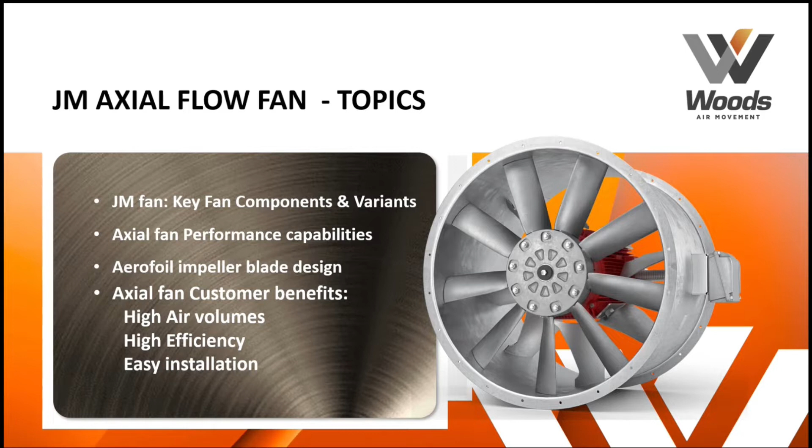Okay, so just to go through the key components, this is an image of a JM fan, but the main components are the same. You have a duct or housing, fan casing - in this case a long casing, so you've got flanges on both ends covering the entire length of the fan impeller and motor assembly.

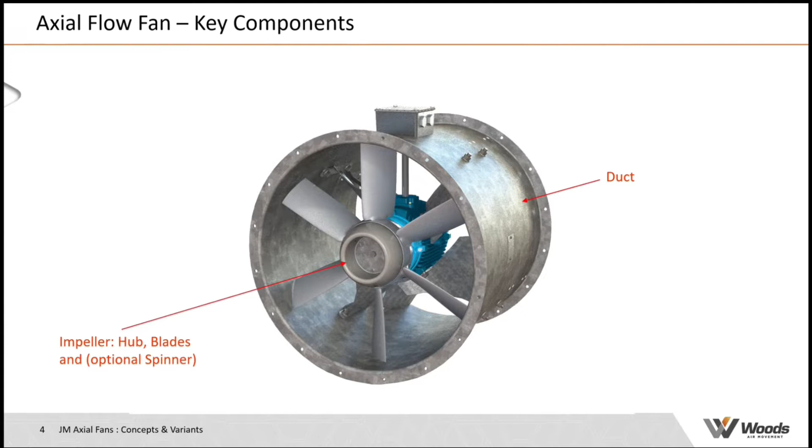You then have the impeller itself, and in this case there is a spinner affixed to the hub - we'll talk more about that later. Then there are 4 mounting arms, which in this case are also guide vanes to add additional performance to the fan. And of course the motor, a key component in the middle, joined to the terminal box on the outside via a wiring conduit.

And that's essentially it. It's a very basic description, and most of you might already know this, but it's useful if you're trying to explain axial flow fans to somebody who's unfamiliar. This kind of diagram says it already.

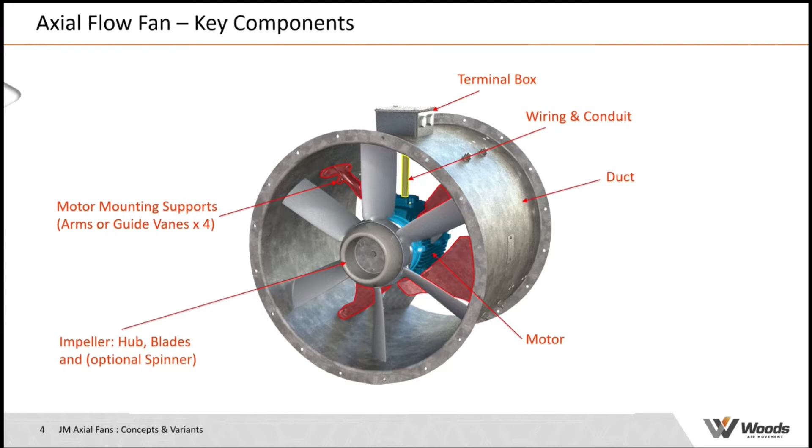Okay, so now I want to do a little comparison between axial flow fans and one of the other key options we've got when looking at a solution for ventilation, or it might not be ventilation - could be some other specific application. Generally the options split down into centrifugal or axial, and there are variants of centrifugal fans. There's something in between, which is mixed flow, but I'm not really going to talk about that - I'm just going to focus on centrifugal fans.

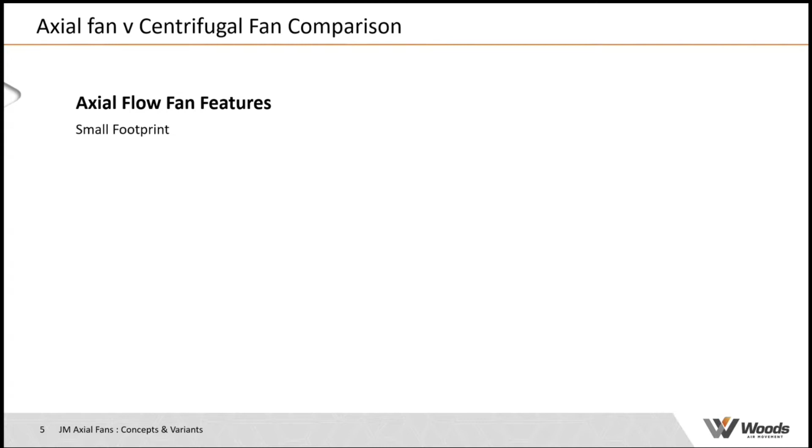So if you look at the axial flow fan features, you could say: you've got a small footprint in the axial flow fan, it's a compact unit really, and easy to install and remove from ductwork because it's installed into inline ductwork, which is different to a centrifugal fan. Centrifugal fans, by their very nature, turn air around 90 degrees, which means that unless you've got more complicated casing, the air enters and leaves the fan at 90 degrees to each other. So the ductwork is a bit more complicated in that respect.

You have efficiencies for the JM range up to 85% - I have to be specific, we're talking about up to 1.6 meters in diameter. There are larger fans in our range with higher efficiencies, which are a bit more bespoke, but we can achieve higher efficiencies - I'm talking more about the standard range. Centrifugal fans may have an advantage over that by maybe 3 percentage points, so it's not a vast difference.

Generally speaking, axial flow fans nowadays - wasn't the case so much in the past - but now direct drive is the only real practical option. Belt-driven fans were something we used to do, and in some markets it's still something people ask for. Coupling drives are really bespoke for OEM-specific applications, so they don't get requested that often, but if there's enough potential for a particular inquiry, we would look at that. Direct drive is really the main solution.

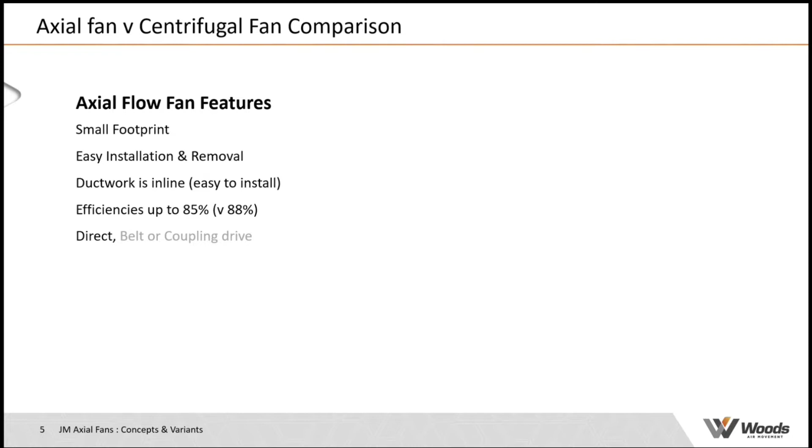So if we then look at noise levels, you can't get away from the fact that an axial flow fan runs at high speed and predominantly creates high frequency noise. But it has to be said that if you're treating that noise with some kind of attenuation device, high frequency noise is much easier to attenuate out than low frequency noise, and it's just a factor of the length of the waveform.

In an axial flow fan you've got adjustable geometry, you've got blades that you can move around to get different performances. So it's flexible in that regard, whereas centrifugal fans have a fixed geometry impeller - you get what you get, and the only way you can vary it is with some kind of belt drive, or maybe speed control, either by VSD or an EC type of option. But you can't do anything to the impeller, it's fixed, whereas axial flow fans have an adjustable pitch impeller. Axial fans are very good at high air volumes and medium pressure development.

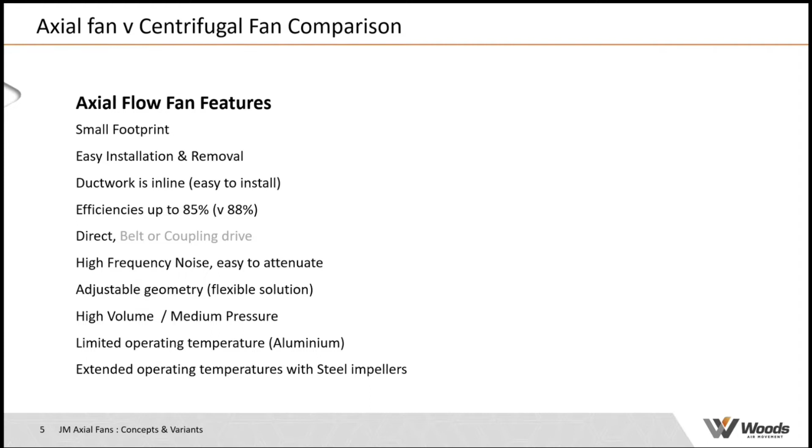Not so good on high pressure development unless you go multi-stage, but that's an option. Limited operating temperature - well, it depends on definition of limited, but obviously I'm talking more about aluminium impellers. So you might be limited in some cases to 300 or 400 depending on rotational speed. But you can extend those operating conditions and temperatures by using steel impellers, which is an option for us.

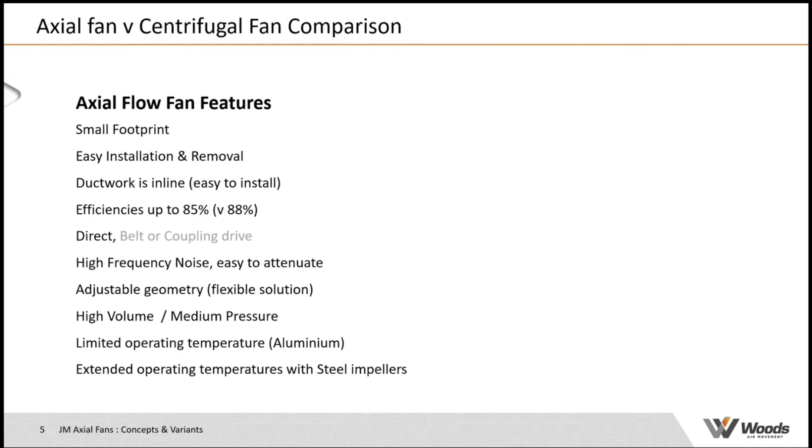So looking at all of those points and trying to weigh up the pros and cons of an axial flow fan versus centrifugal fans, what is the verdict? The verdict is that pretty much the axial flow fan is in a good place for most of those points. Slightly down on efficiency maybe, and maybe it's got some limitations with aluminium, but we can address that with different impeller materials. So it's in a pretty good place, and also quite competitive in a lot of places versus the larger centrifugal fan offering. A good solution for a lot of cases.

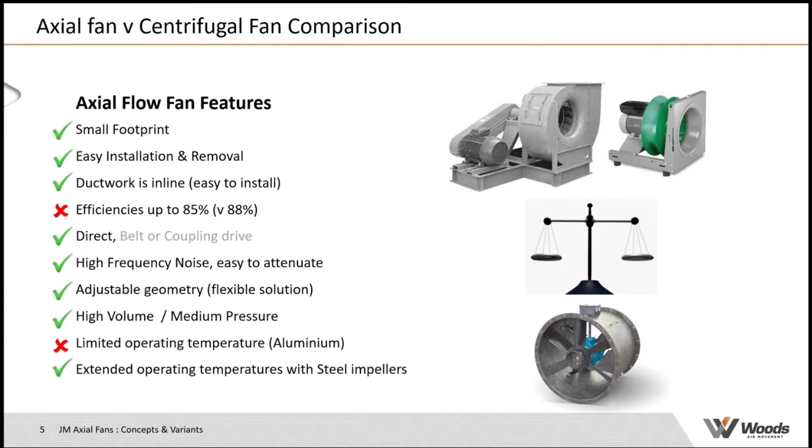If we look at the standard range, up to 1.6 meters in diameter, we're talking about this type of product for the JM range - just focusing on the JM range now, rather than the JMv, which we'll get to. As I said, adjustable pitch impellers made out of die-cast aluminium.

We can have all sorts of different motor options in terms of speeds. Because of the way the impellers are constructed, we can vary the number of blades and get different performances from that. We can also vary the diameter of the hub and get different performances from the fan for any given diameter of fan. We can also create different casing variants. The one you see on the screen is the long case, but there's also short case and plate mounted, if that's more appropriate for the application.

And as it stands, we've got a product that has most of its main structural components made out of steel, which is galvanized. So it's a very robust type of anti-corrosion finish.

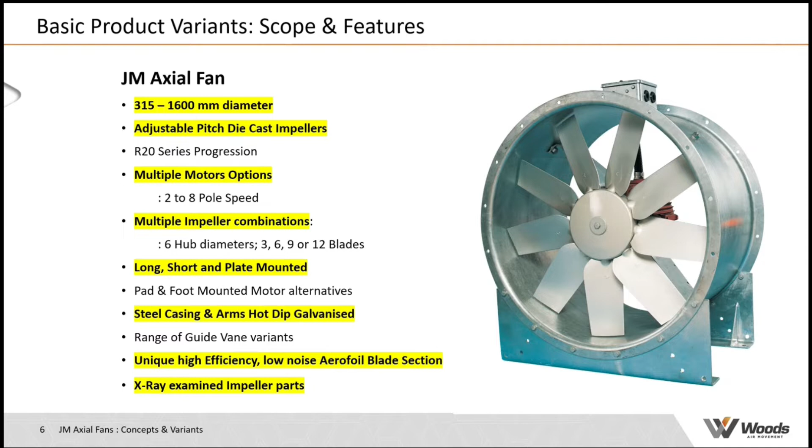We have this high efficiency, low noise aerofoil blade section, which we pioneered in the industry. And just to make sure that the impeller solution is robust, we X-ray examine the impeller parts, because they might look great from the outside, but there could be a fault in the casting on the inside. And we are absolutely passionate about giving our customers the best possible solution.

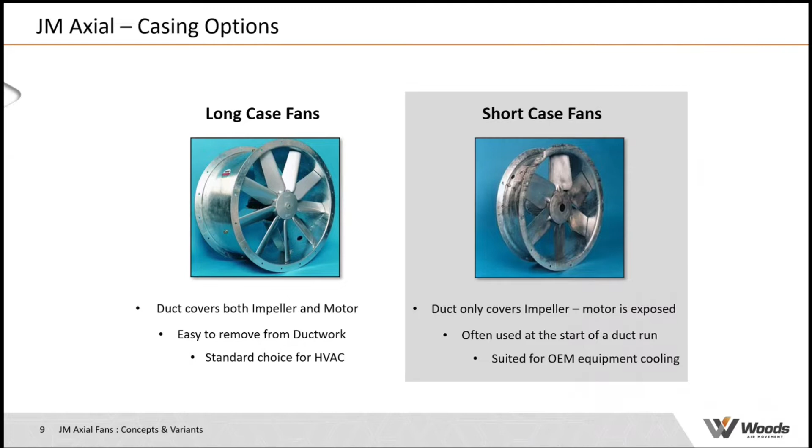Motor mounting is another issue that we address. I've only shown two motor mounting options, but there is a third, which is flange mounting, which I won't really get into.

It is really important in terms of aerodynamic performance that we minimize the blockage and turbulence created inside the duct, because turbulence reduces efficiency, and energy efficiency is very much on everybody's minds. So the pad mounted solution is a better solution from that point of view.

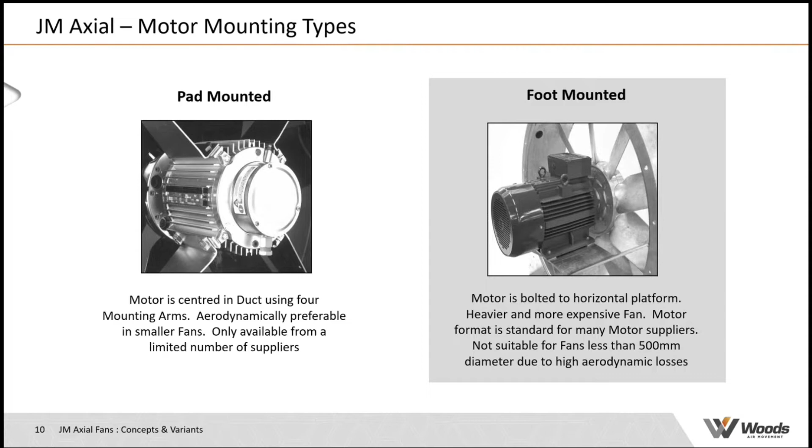If you look at the short case fans in particular, because of the extra terminal box that's in the airstream, that does put a limit on the minimum size in terms of diameter of fan. We tend to limit it to 500 millimeters, where the losses due to turbulence are still acceptable, but below that diameter you'll get an increasing level of turbulence and impact on the performance.

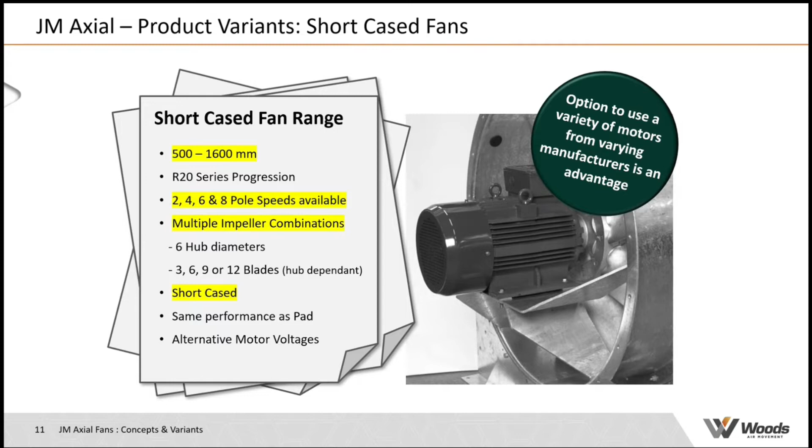The performance impact is not just airflow and pressure development, it's also noise level. So you'll increase the noise level as the turbulence increases, which is bad from an installation point of view, because noise level could be quite sensitive or important to the customer. So you have to keep bearing that in mind.

What I'm showing you there is a unidirectional fan blade section, but we also have a truly reversible section, which looks like two of those sections on top of each other, but with the broad end opposite, giving a more sausage shaped type of section. That's what we refer to as a JMTSP. It's a truly symmetrical performance, so very close performance within a couple of percent forward and reverse, and it's designed for pressure development rather than thrust development. We'll get into that a little bit later.

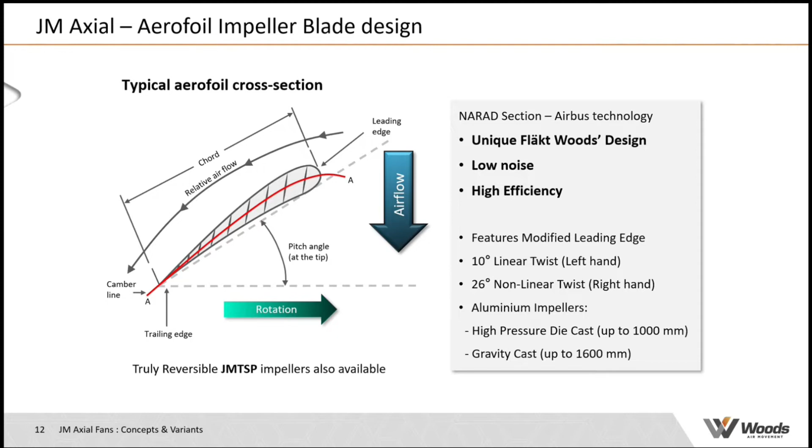That really depends on a couple of things. There's the build limits - we don't want to make the tip gap extremely small, because that makes a fan more difficult to build. So you have to be practical about it.

The other factor, for higher temperature fans, is that they need a larger tip gap, purely because at higher temperatures the aluminium blades expand. If you don't leave a larger gap, the blade tip will contact the casing and the fan will stop - or worse, something will break, creating a hazard. With a high temperature smoke extract fan, the last thing you want is for it to stop during the 2 hours it's designed to extract smoke, because its whole point is to let people get out of the building.

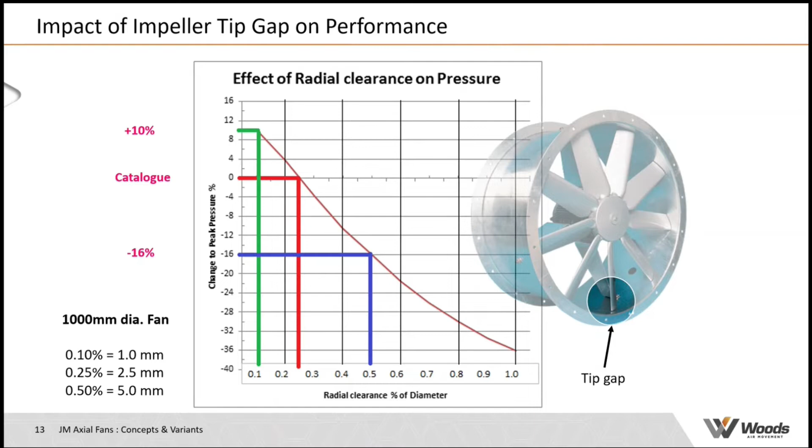Okay, I think we've talked about that enough. The next attribute of the fan is form of running. Here are the two possible options: form B, which is the standard - I've no idea why we chose form B rather than form A - but form B is the standard, and it's air over the impeller first.

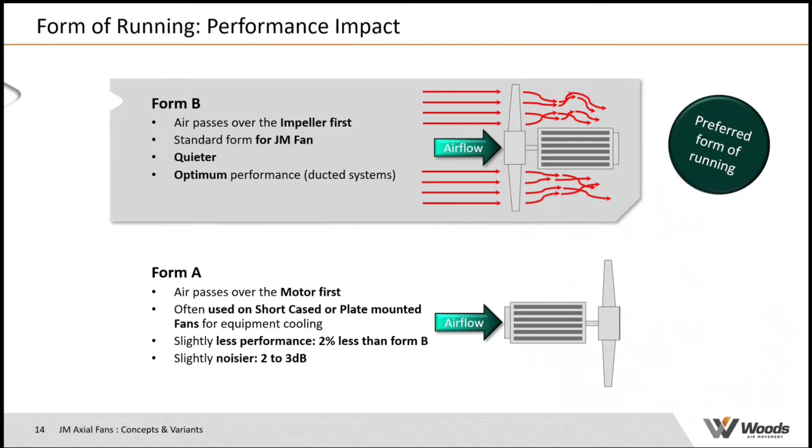What happens is air flows over the impeller, and this is preferred because the airflow looks like that - you start off with laminar airflow before the impeller, going through the impeller, then turbulent air coming off the back. Because it's laminar flow going through the impeller, you get much more performance than if it was the other way around.

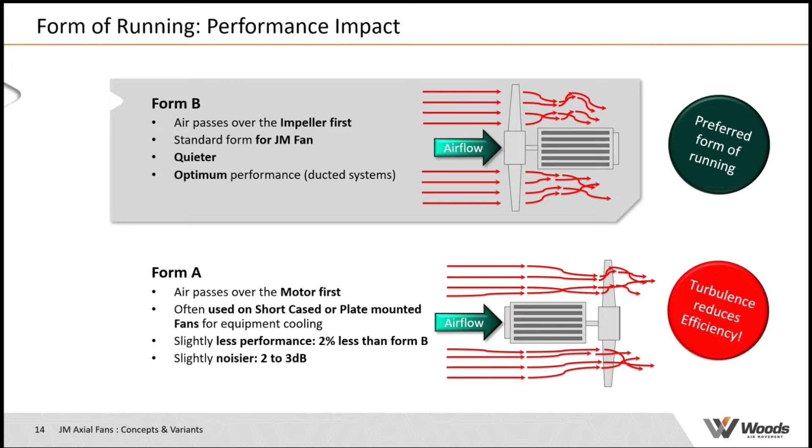If it's the other way around, you get a performance that looks something like that - turbulent air going into the impeller because it's been disturbed by going over the motor and through the motor supports. That can give you a reduction of a couple percent in performance versus form B, and can increase the noise level, because the turbulence is wasted energy, which is often exhibited as noise. That example can be 2 or 3 dB higher, which is not a welcome situation - turbulence basically reduces efficiency.

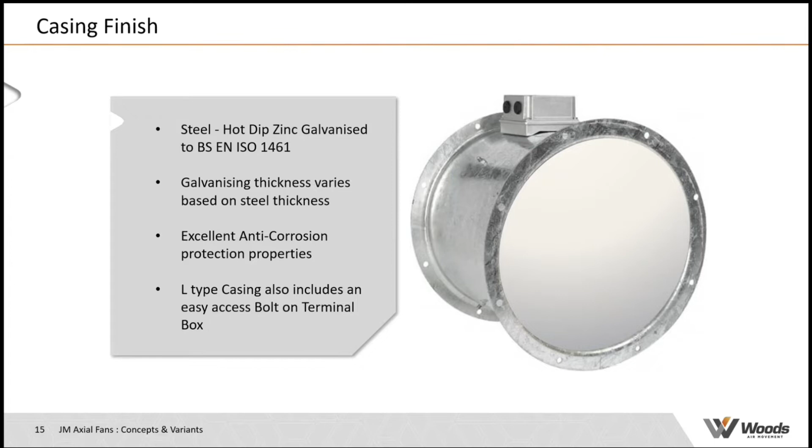Looking more at the physical attributes of the fan now rather than performance: you've got a casing which is steel, hot dip galvanized. The fixings are all produced with an anti-corrosion finish, and the mix of materials for the fixings versus the casing is quite important in particular environments, because you can get galvanic corrosion if you have the wrong mix of materials.

So we have to be quite careful about that, depending on the application. The idea is you have the right mix, and it repels the corrosion agents, slowing that process down.

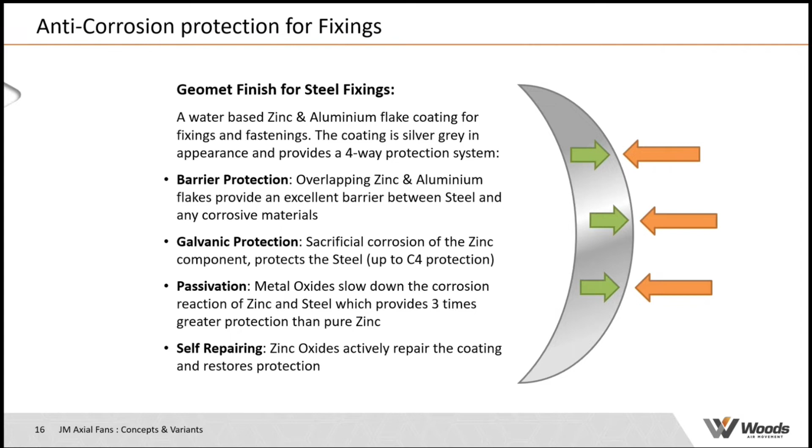If you look at the impeller, which is the heart of the product, you've basically got 3 main components. You've got 2 halves of a hub, so you get a hub and clamp plate, and then you get blades, and you can put those together in different configurations.

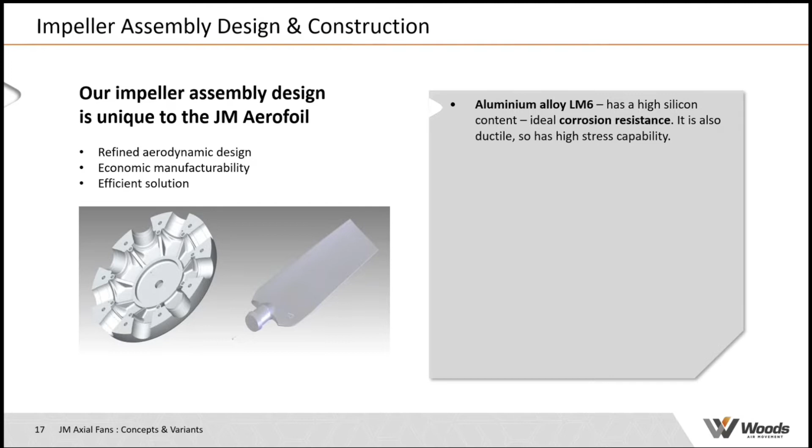We use an LM6 aluminium alloy, which is a very good solution in terms of the fact that it's got corrosion resistant properties, because it has high silicon content. It's also relatively easy to cast into the correct shape, and it has a high stress capability. So it's a good material, proven over a long period of time.

We can use a slightly altered alloy mix, LM13, which is better for high temperatures. It's more rigid for that high temperature application, which is exactly what you need, but it's a little bit more difficult to produce because it doesn't flow into the mold quite as easily when casting. So you couldn't just standardize on LM13 everywhere, and it's also a little bit more expensive.

But as I mentioned before, we X-ray examine all of these components to make sure that they're good. We have a tight control on tip gaps, and the pitch angle is adjustable, so we can give the customer his desired duty.

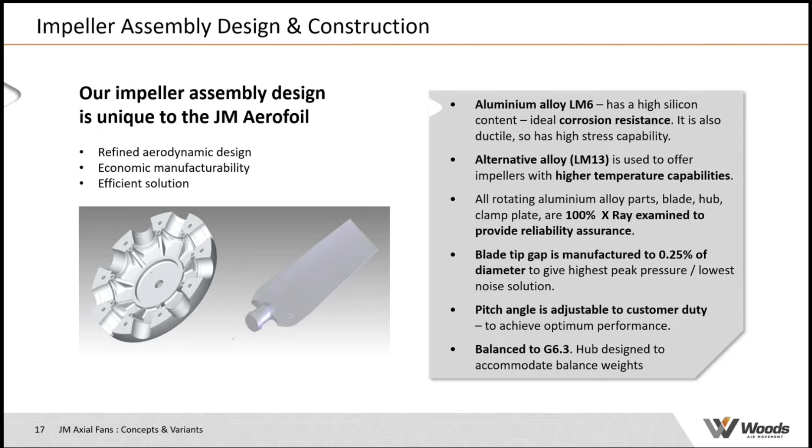So what I'm going to show you now is a chart with some impeller solidities mentioned. Down the left hand side you've got a number of different hub diameters and blade options, with graphical representations of those. Depending on the number of blades you need to fit, that will affect the hub diameter, because the larger hubs can fit larger numbers of blades. And if you have a higher number of blades, you can get more pressure.

Depending on the mix between the diameter of the hub and the number of blades, you get different pressure developments. On the right hand side, we're showing a particular example of impeller where the three lower performance envelopes show a single stage fan with either 3, 6, or 12 blades. Just by changing the number of blades you can go from around 350 pascals maximum up to about 1000 pascals maximum pressure development, and you also increase the airflow capability.

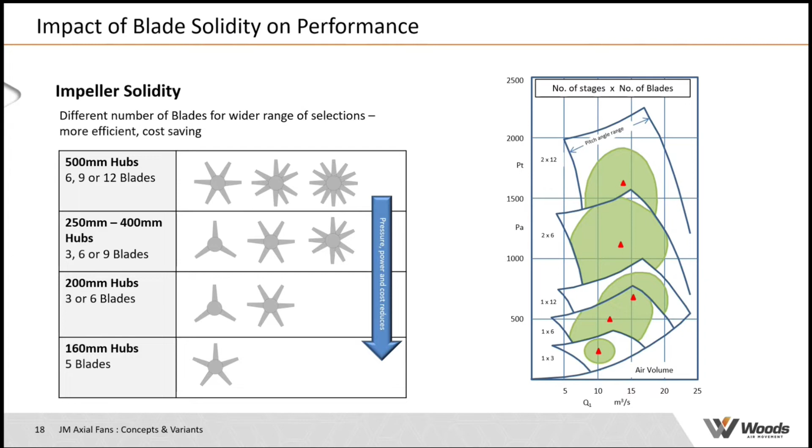So as you can see, that makes the platform we've got quite a flexible one. So what is a two-stage fan? What does that actually mean? Well, this in particular is what we're talking about.

We've tested this out, and our experience is that if you have two identical fans bolted together, they give you around 2 times the pressure development. But if you reverse one of the fans so the impeller is facing the other impeller, with a bit of space between them, and rotate that impeller in the opposite direction—obviously turning the impeller blades around so the angle of attack is correct on the aerofoil section—the first stage gives a turbo boost to the second stage. You then get a 2.7 times pressure development increase, so you actually get an extra performance advantage doing it that way. That's called a contra-rotating design, and it's quite normal for our JM2 product.

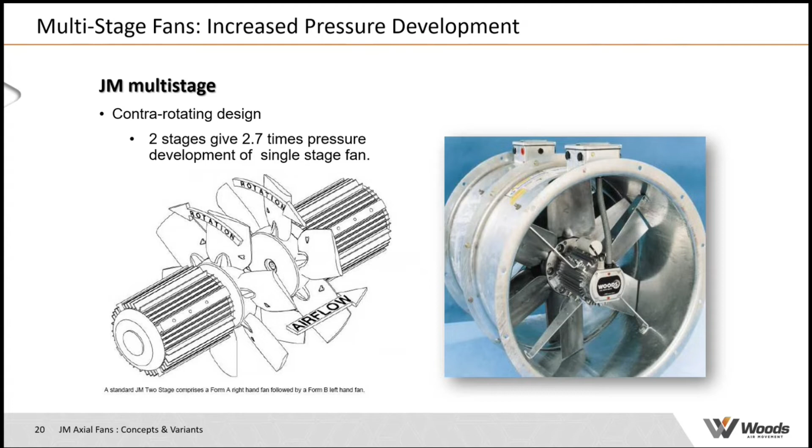It's also possible, where you've got a two-stage fan, to provide some degree of duty standby in a scenario where one of the stages fails, or if you have two completely identical fans, to get a duty standby arrangement. We can also do that, and it has performance implications as well. I won't be talking about that in this piece, but it's a separate subject and something we do offer. So that's two-stage fans.

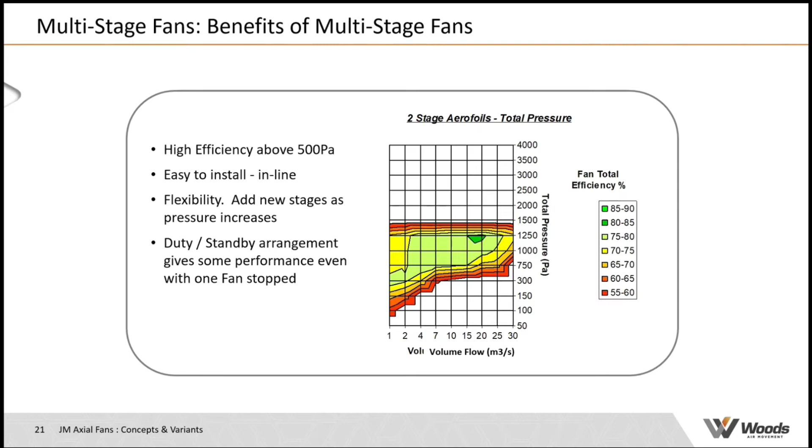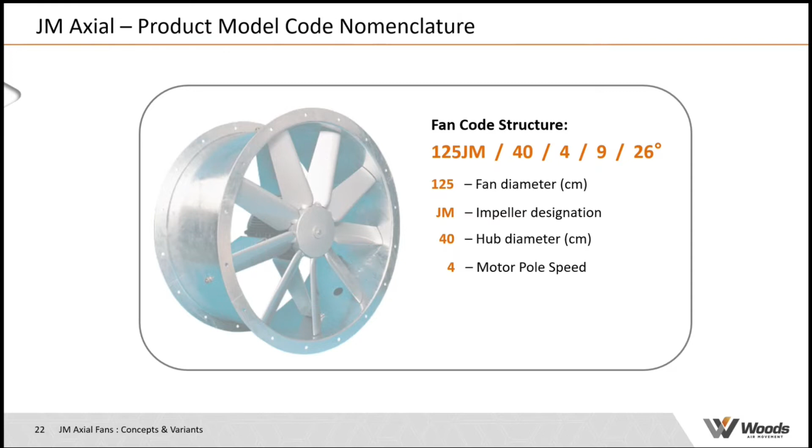The 125 is the diameter in centimeters. Then you've got JM, which is the blade designation or blade design. 40 is the hub diameter in centimeters. Then you've got 4 for the rotational pole speed, the nominal pole speed of the motor. And finally, you have the number of blades. That's all the physical parts of it.

Then you have the setting of the blade angle, and in this case it's 26 degrees. That doesn't alter the blade per se, other than profiling of the tip when we're building it, but it does impact the performance of the fan directly. It may also impact the sizing of the motor, because higher pitch angles require more power. So we take all that into account when we select the fan. That's how we code the fan.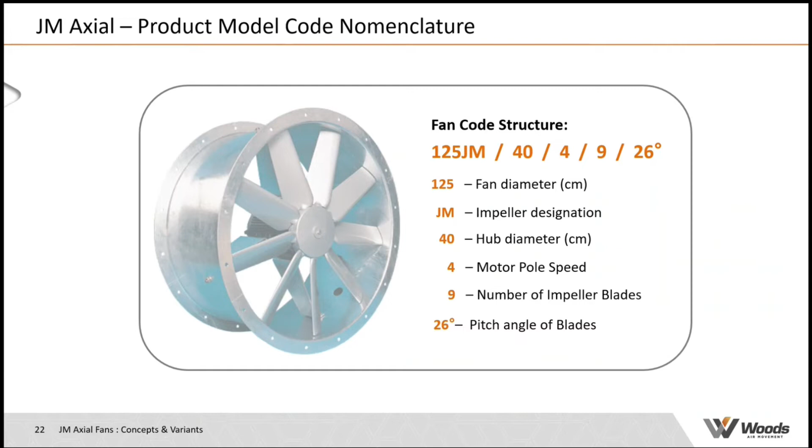Having explained the coding of the fan, the next thing to talk about is accessories. I'm only going to talk about the standard accessories that most often get selected and used for installation of the fan. So you need to somehow support the fan—mounting feet that look like that are the thing to use.

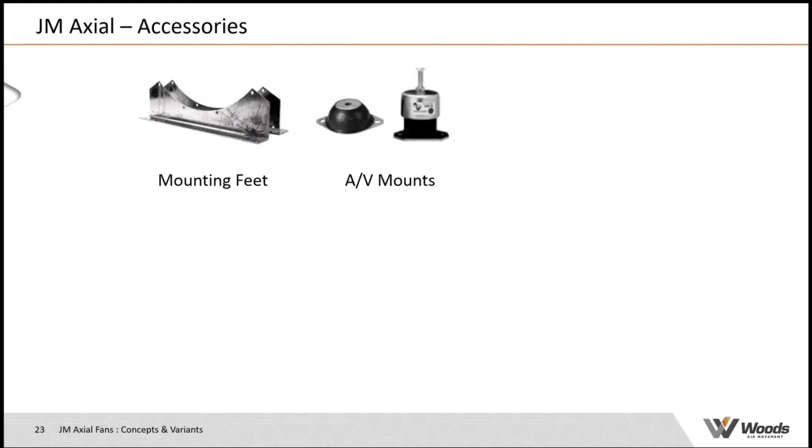Underneath those feet, we support the fan with anti-vibration mounts. I'm showing two types here: a rubber mount, typically for standard temperature, and a spring mount, typically for high temperature solutions.

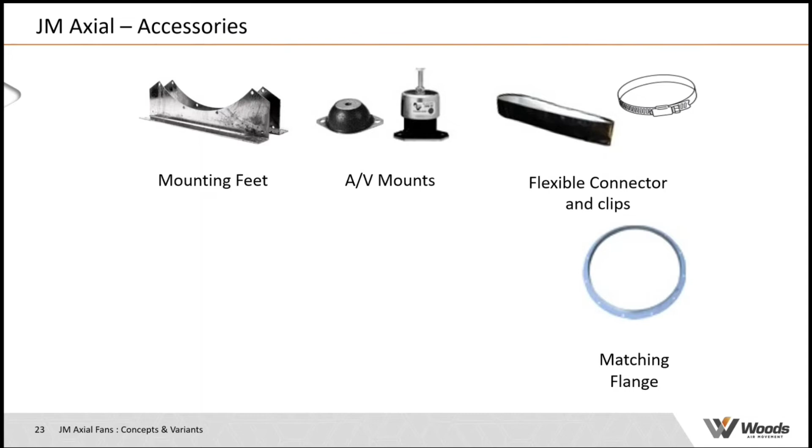Because you've got the fan mounted on mounting feet and AV mounts that allow it to move and flex up and down, flexible connectors and clips to keep those connectors attached to the fan and ductwork are then required. If you've got that type of scenario, to connect your fan to ductwork you may well need matching flanges.

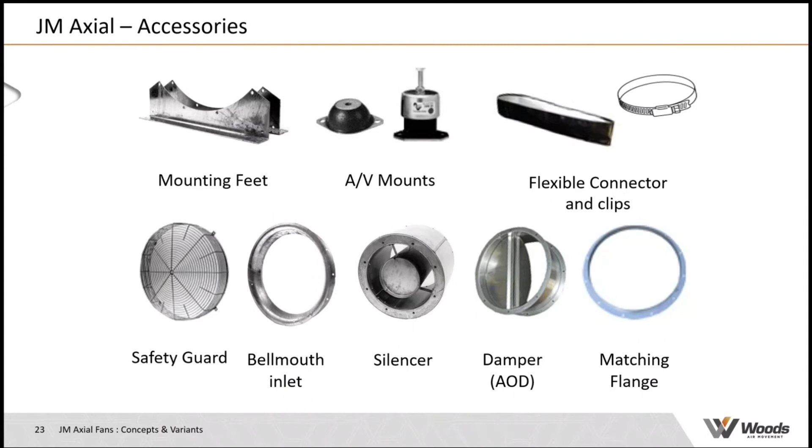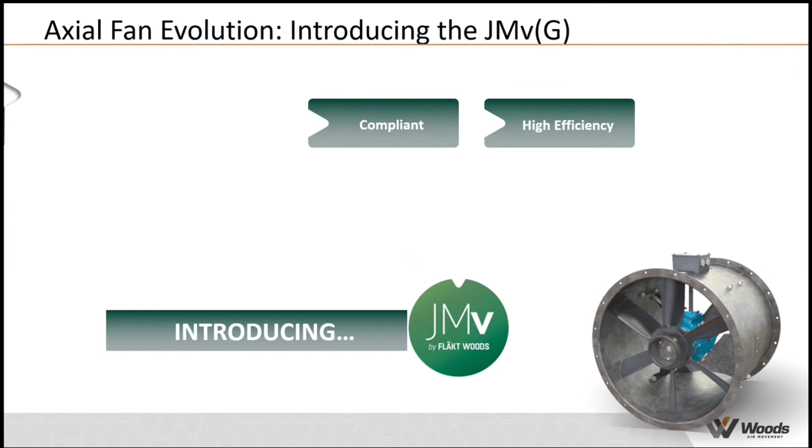Okay, so the takeaway there is a massive running cost saving that we're showing. Obviously that's the best efficiency we've got of running cost saving across the range, but it's quite astounding that we can offer nearly a 45% reduction in running costs, because we basically took the JM fan, put that to one side, came up with a blank piece of design paper, and asked how do we design a fan with more efficiency in mind?

So now we've got a range up to 1400 millimeters. And the first thing you'll think is, well, Andy told us previously when talking about JM fans, the standard range is up to 1.6 meters, and now we're only talking about 1.4. Well, here's the news: the JMv fan gives you more performance for less diameter and less power, so you get more for less.

So you don't actually need a 1.6 meter fan, because the 1.4 meter fan in the JMv range gives you very similar performance to a JM 1.6 meter fan. So we didn't really need to go to 1.6. At some point we may do that, I'm sure, because we'd then offer a 1.6 meter fan giving more performance than a 1.8 meter fan of the old design. So obviously it has advantages, but more for less is the key thing to keep hold of.

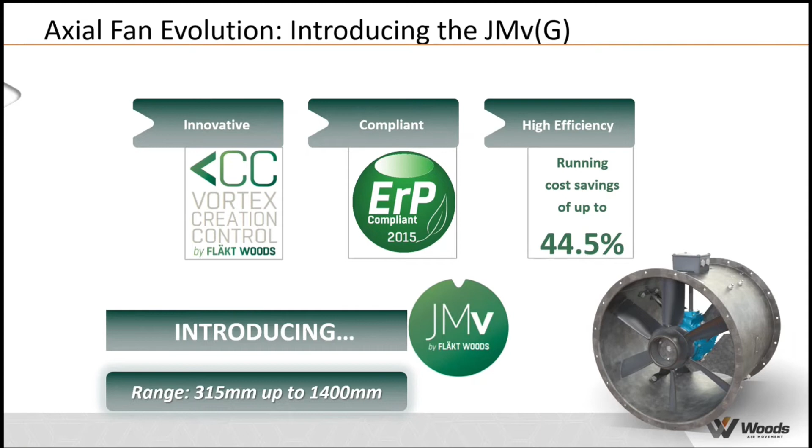The reason I say that is when people are judging us against others, asking for a price and the performance for a particular diameter of fan, what we really ought to be looking at is what performance do we need and what is the optimal selection, because often the optimal selection is one size smaller. So just keep that in mind.

So what are we going to talk about in this segment? The range benefits for JMv, how JMv(G) delivers the energy savings - I'll talk about that in a second. We did some performance benchmarking, a little bit about carbon footprint reduction and the environmental dimension, a little bit about the engineering design technology we use, and then really what is this VCC thing, the Vortex Creation Control feature that we keep talking about. So we'll go through and explain all that.

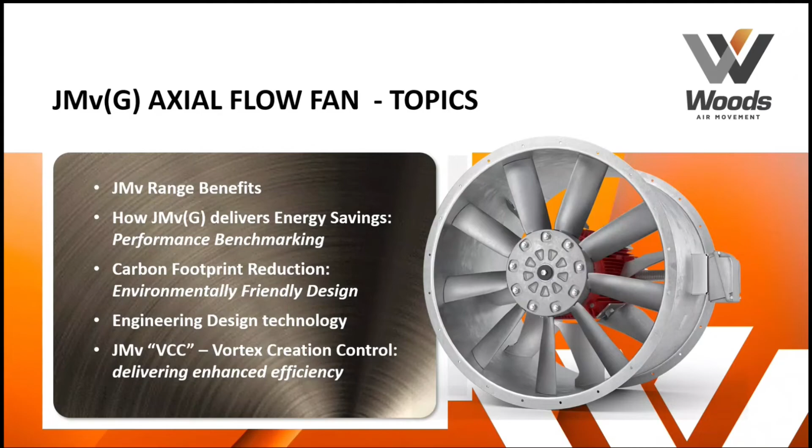So the first thing we have to say is that when we were designing the JMv range, we wanted it to do exactly the same job, but at a higher efficiency compared to our JM range. So it shouldn't be worse - it could cover all of the temperature performances we had before. It should be a robust type of construction, a fit-and-forget type of solution, but it must have lower running costs for the end user to benefit from, lower fan costs for the contractor because they always want a lower price from us, and higher efficiency, because consultants have a tough job trying to keep the energy use of buildings down - there's a downward pressure on energy usage and therefore an upward pressure on efficiencies we need to use. So those are the important things to look at.

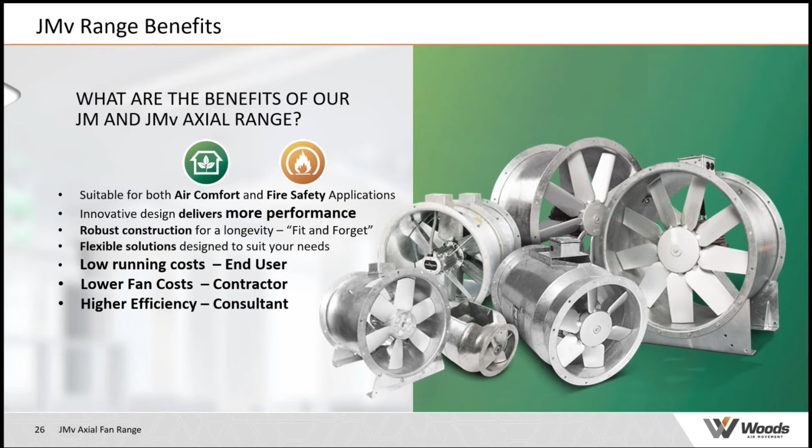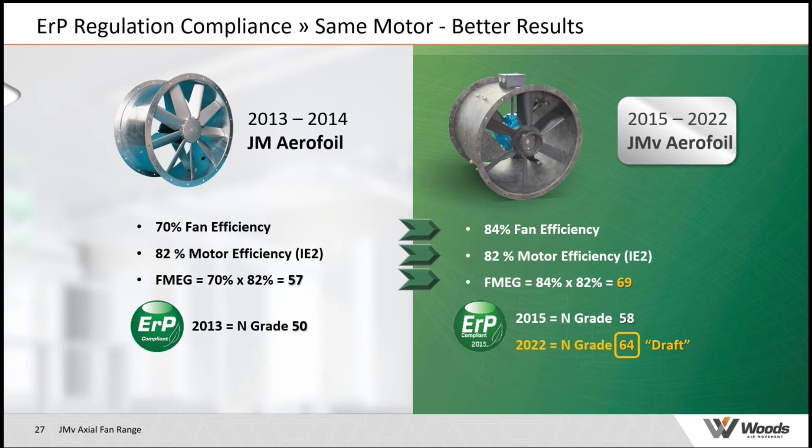Okay, so just a few examples of benchmarking. Now, what I said right at the beginning is don't compare size for size, because that's not really the most logical way of doing it, but quite a lot of people do that. So I've done a size for size comparison here, to illustrate that the JM fan has a particular performance for the size, but the JMV always has more performance. This feeds into my comment that most likely you can go down a fan size with JMV and get similar performance to JM.

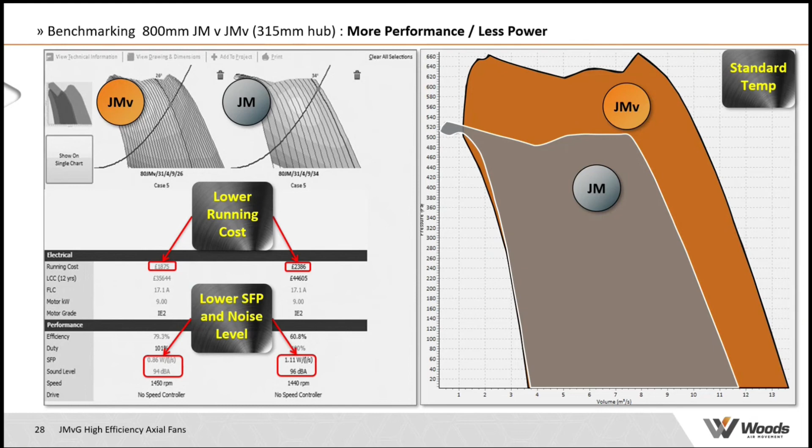In this example, we've got lower running costs, a lower specific fan power, and a lower noise level. For these two examples, even though you've got more performance, you've got lower noise levels, but nearly a 15% increase on airflow and about a third extra pressure. So that's quite an improvement.

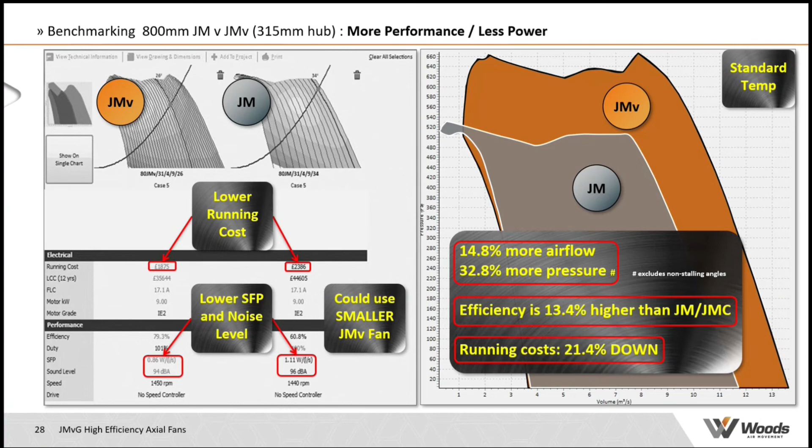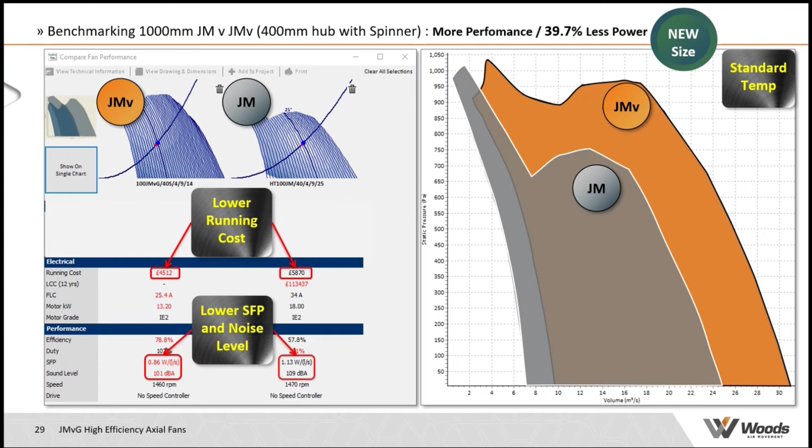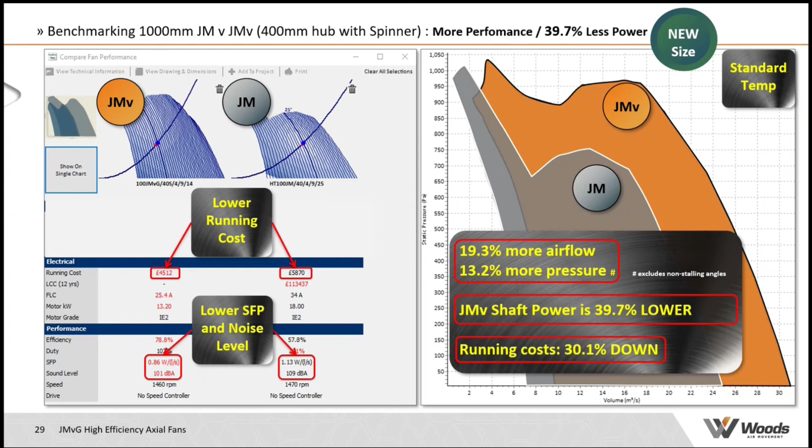If you look at the 1000mm fan, you've got a similar story: lower running costs, lower SFP and noise levels, but even more airflow - over 19%, slightly less extra pressure development, but almost a 40% power reduction at the shaft, and the running costs come down by 30%.

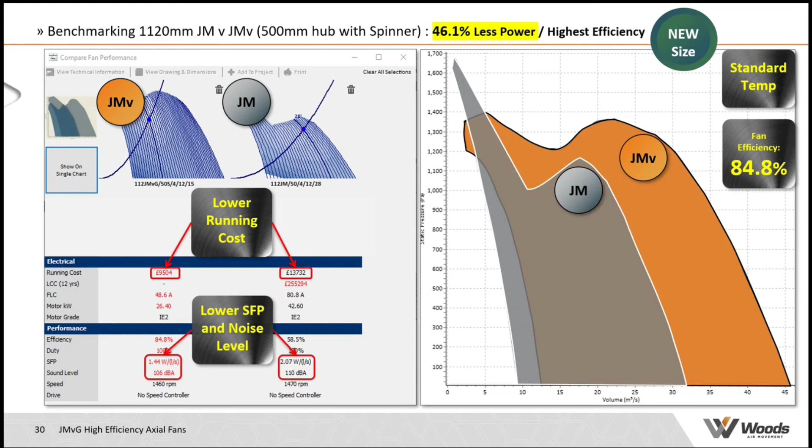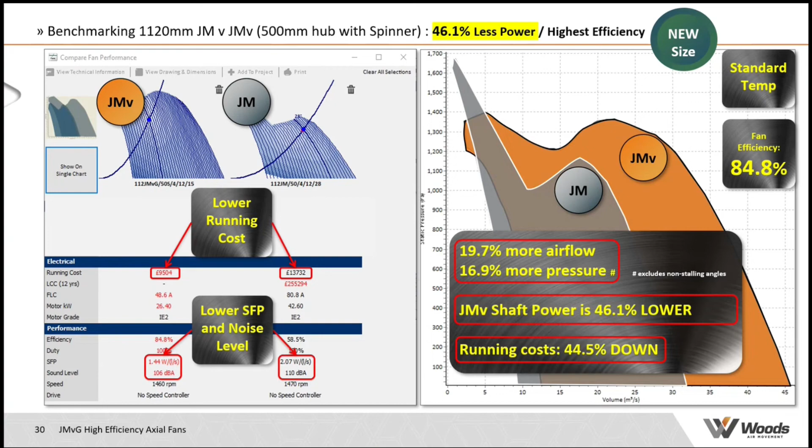Then we've got the 1120 size, and this is the one where it's almost 85% efficient - lower running costs, again lower noise levels and specific fan powers, nearly a 20% extra airflow, and a 44.5% running cost reduction. So that is our sort of star size, if you like. As you can see, that's quite a significant improvement.

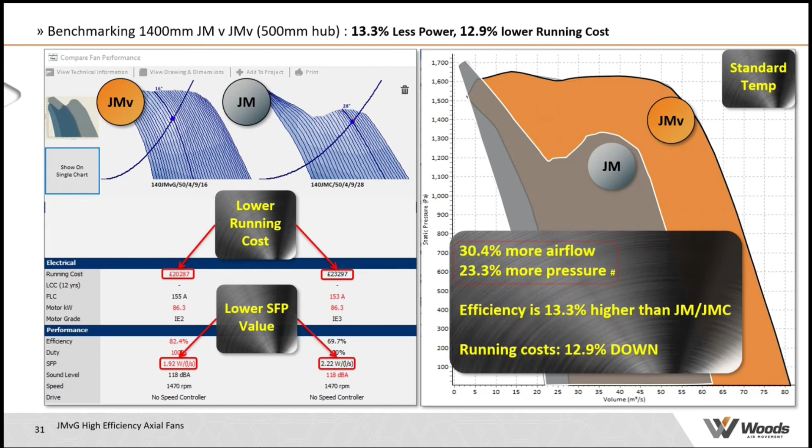And then finally, the largest fan in the range, the 1400mm fan - it was already quite an efficient fan as a JM, so we haven't increased the performance quite as much, but still 30% extra airflow and 23% more pressure, though the efficiency is only 13.3% higher than a JM.

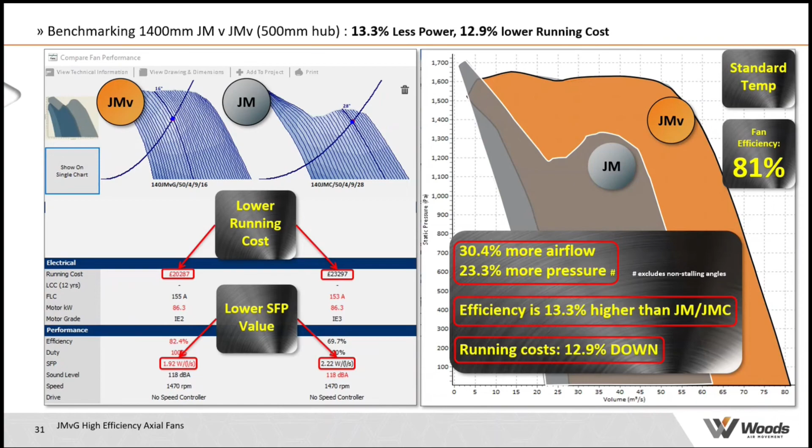So not quite such a big step change, but still quite impressive nonetheless. So if you then think, well, what does that all translate into? If you look into operational savings, if you look at a typical fan that would run without major overhaul, so it would have a 12-year running life, because that equates to about 100,000 hours of bearing running life. These are the numbers.

It's a huge number of kilowatt hours that you can save, and running costs, nearly 111,000 pounds worth of running cost savings, but 624 tons of carbon saved. That's an immense amount of carbon reduction for a fan over its lifetime.

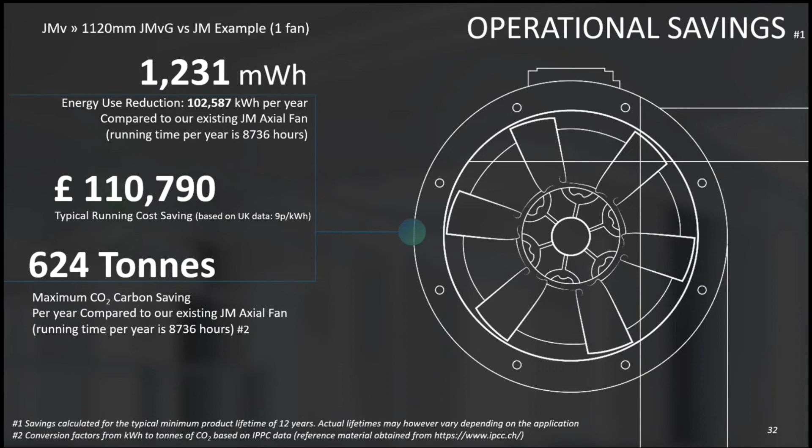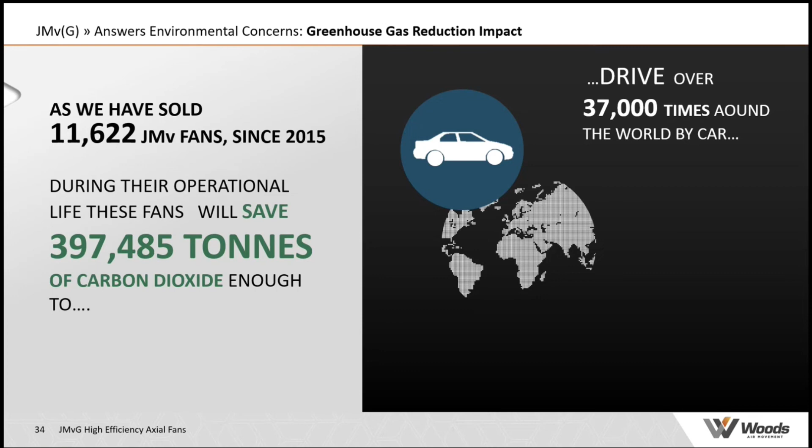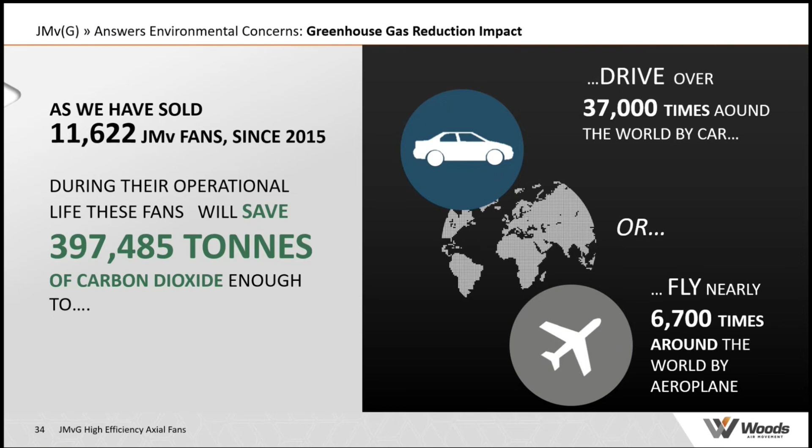Everybody kind of thinks about carbon reduction in terms of trees, because trees are used very often as a way of offsetting carbon, obviously because trees will absorb carbon dioxide and emit oxygen. So the equivalent is 331,000 trees, over 136 hectares or 334 acres of forest. So that's an awful lot of trees.

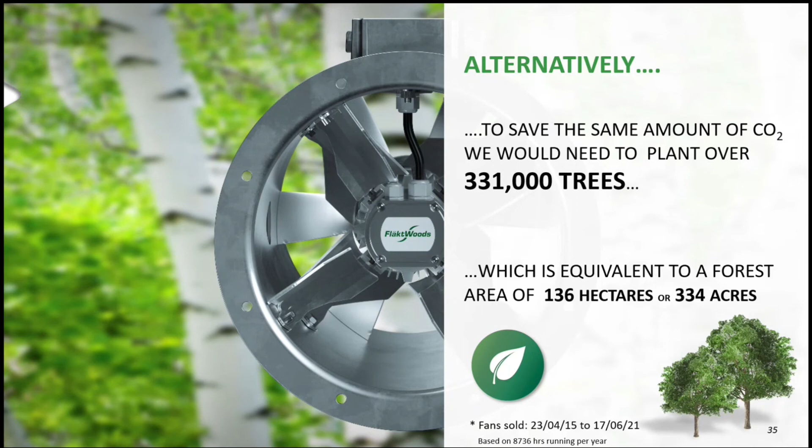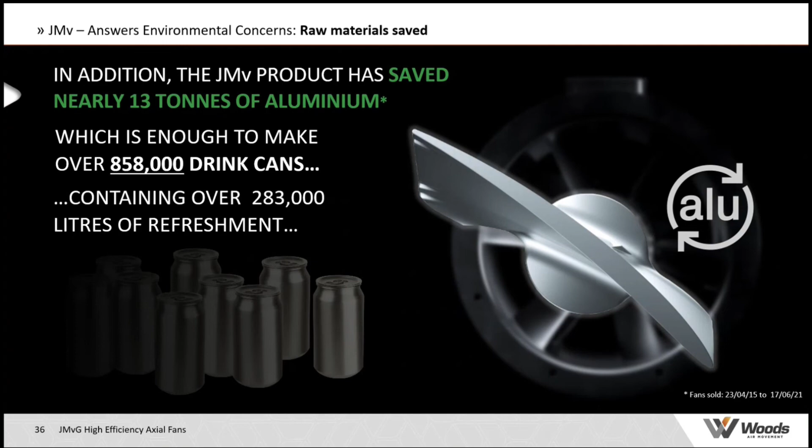But we don't leave it just there, because when we designed the impeller parts, we looked at the material usage very closely. Based on the fact that we've got a thinner section on the blade, but it's still a very robust design because we've tested it, we've saved nearly 13 tons of aluminium. That's enough to make a huge number of drink cans, 858,000 aluminium cans. So that's a lot of cans.

So obviously the design process that we followed was all focused on trying to get higher efficiencies and lower impact on the environment, which is what I've just shown you. So one of the key tools in terms of performance was CFD, computational fluid dynamics.

And really, this is a way of modeling a fan in a virtual way so that we can do a little bit of a what-if scenario to get to a point where we can reach the optimized design.

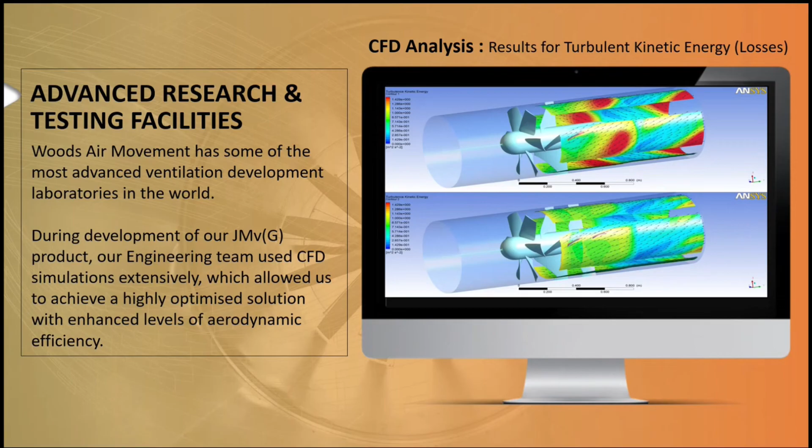And what we've done with the JMv fan is looked at each part of that journey through the fan and said, how can we improve that? Each little incremental change is added to the improvement in the loss going through the fan as air travels through. So that's what we did to minimize the aerodynamic losses.

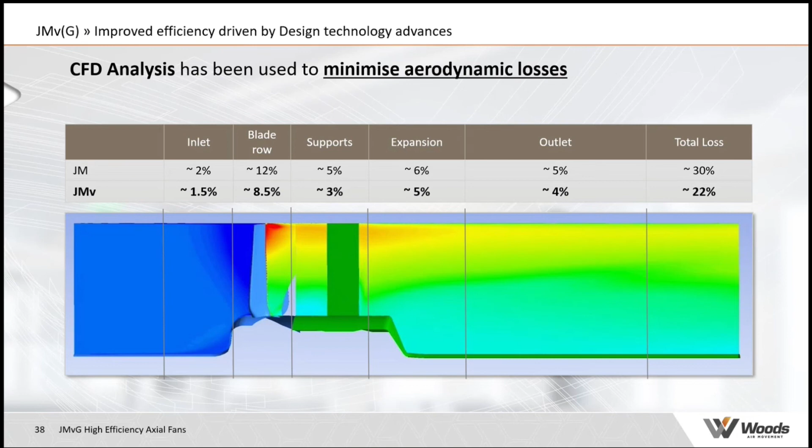And then if you look at turbulence generated on the blades themselves, looking at a slice across the end of the fan now, so you're looking down through the fan, you can see the red dotted line, showing a representation of where the fan blade would be. Before the blade and after the blade, you see red areas of high turbulence in that top plot, and a little bit of red at the tip.

Now you'll see on the top left-hand side, the edge of that blade is just a flat plain edge, whereas in the bottom plot, you'll see that it's got features on the trailing edge, which are known as vortex generators. That's where we get to the VCC, the Vortex Creation Control process we were talking about earlier. You can see that by putting these little features on the trailing edge of the blade, we've actually reduced the amount of red in that plot, which means there's less turbulence.

Less turbulence is good, because that means higher efficiencies, which is what we're aiming at. So let's highlight the obvious there, which is these are the areas of reduced turbulence, so that's more performance.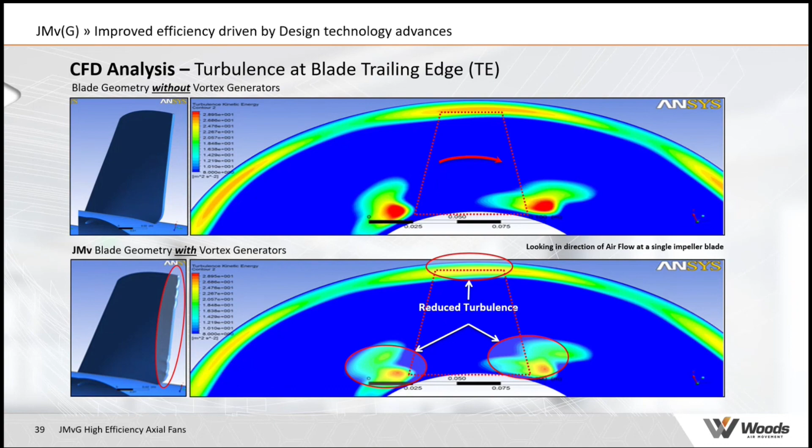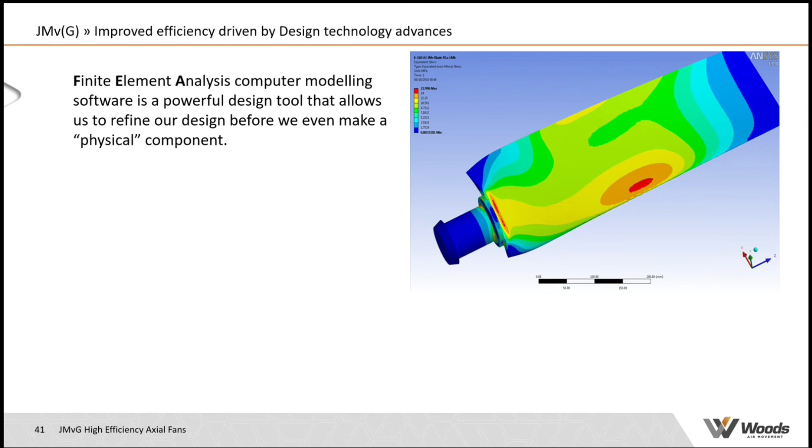We can plot the actual forces being exerted on the blade in different places, and we can do this in a virtual way so that we can make sure the whole fan design is robust before we've even manufactured any physical fan.

Once we design the fan in a virtual way and then build it in a practical real world example, we match up the prediction of the performance and the stress levels with the model to see how well we did. We do that by putting strain gauges on the material and doing a lab test. So these are the sorts of tools we use, and all of that has gone into creating this range of JMv impellers, which have got these main attributes.

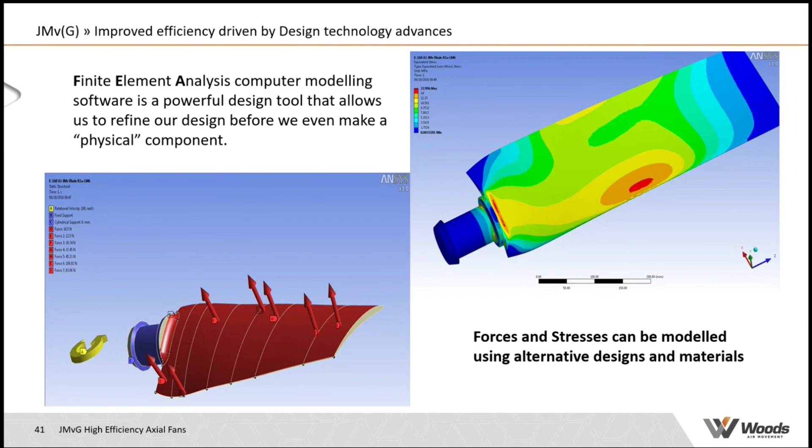On the smaller examples, we've actually got the VCC logo added to the blades, but you've got this high twist blade design that you can see, which is more efficient at low angles. You've even got a spinner that we add to some of the larger sizes. We've got tight tip gaps and tight fitting components, and in this particular case, the smaller fans have got the two-stage guide vanes.

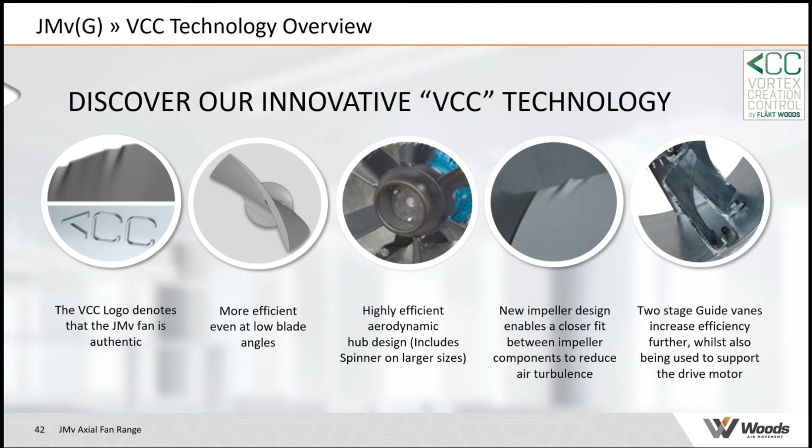Now the single-stage guide vanes that we use on the larger examples for the JMvG, the G is denoting that it's a single-stage guide vane. So that gives you a differentiation between the two types, but they're really part of the same family. The key features are that the blade fit is very tight.

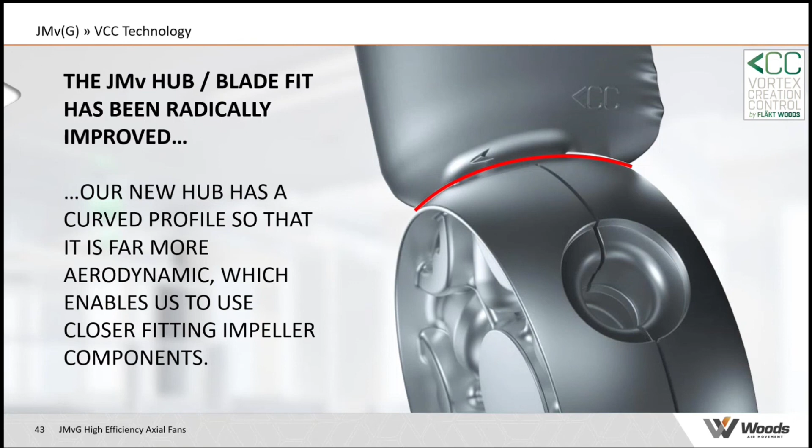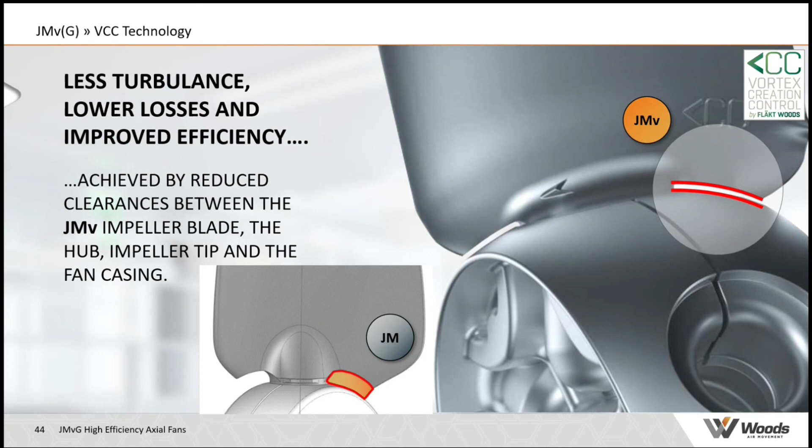It doesn't vary even if you twist the blade around, so it's the same distance, and that's because the hub is actually curved, unlike the old hub section on the JM, which was flat and had to have much larger relief features, which obviously create more turbulence. Then you've got the high twist blade, as I mentioned before, which gives you excellent performance at low angles, and these blade features which give you this effect.

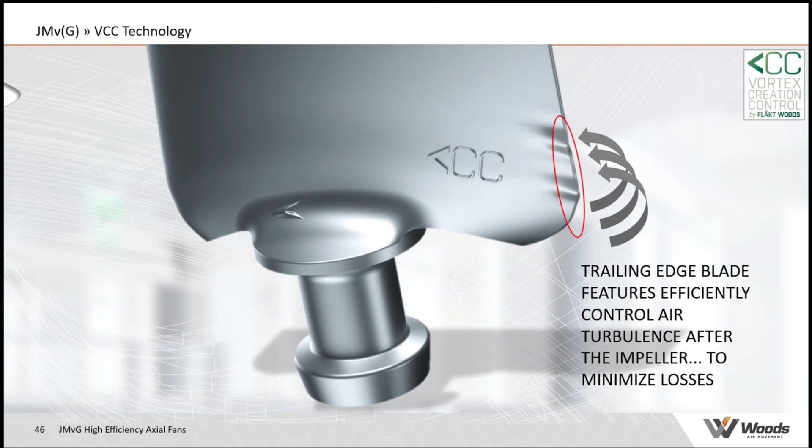Now the interesting thing here is that these features generate vortices, which seems counterintuitive, but actually the generation of some local vortices behind the blade, or the turbulence behind the blade in some places, actually encourages the airflow to straighten out into a more laminar airflow much quicker, and therefore it reduces your efficiency reduction overall. And then finally, you've got this spinner that we add to the front end of some examples to improve the airflow a little bit more.

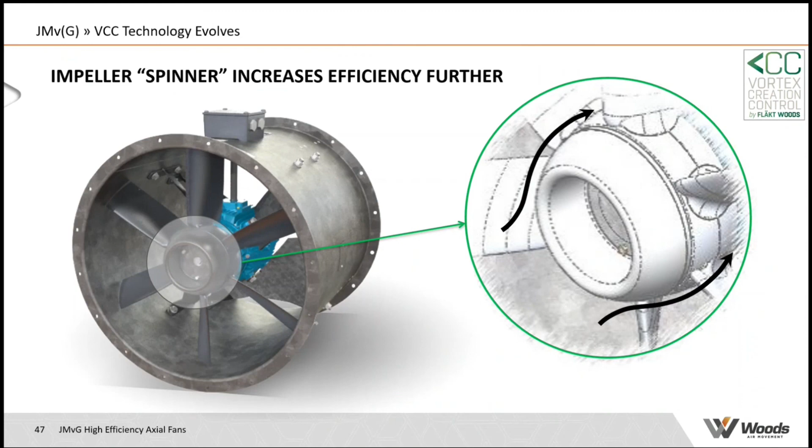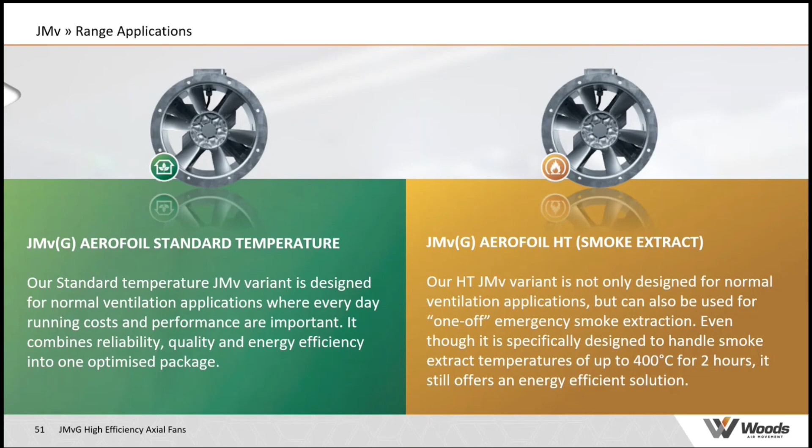Okay, so what I'm going to do there is leave the presentation at that point. This particular presentation slide deck, we've got to slide 51 of 90, so you can see there's quite a few slides after that. But the following slides are more to do with the rest of the range, other variants, and some application advice, so it's more of a resource for people to dip into if they need to know more. But as far as the presentation of the range in general and JMv in particular, that really is where I can leave the presentation.